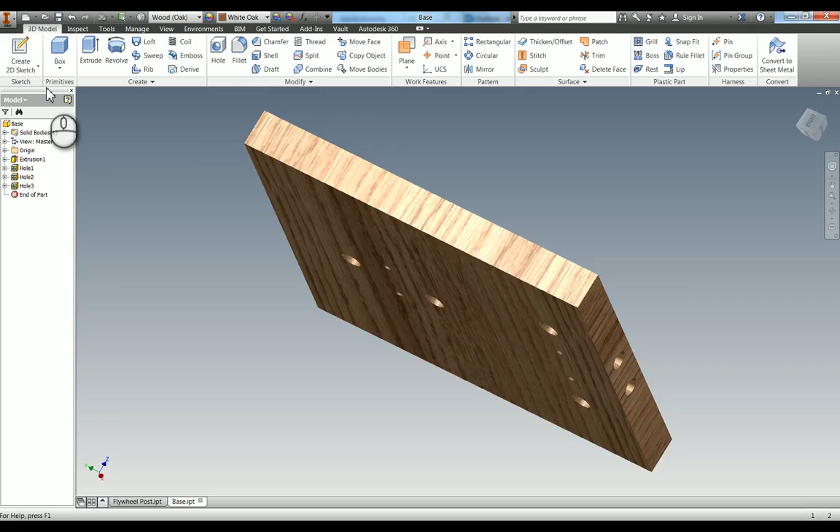We're now going to model the base. So we're going to start another new standard millimeter.ipt, and do a sketch on the XY plane.

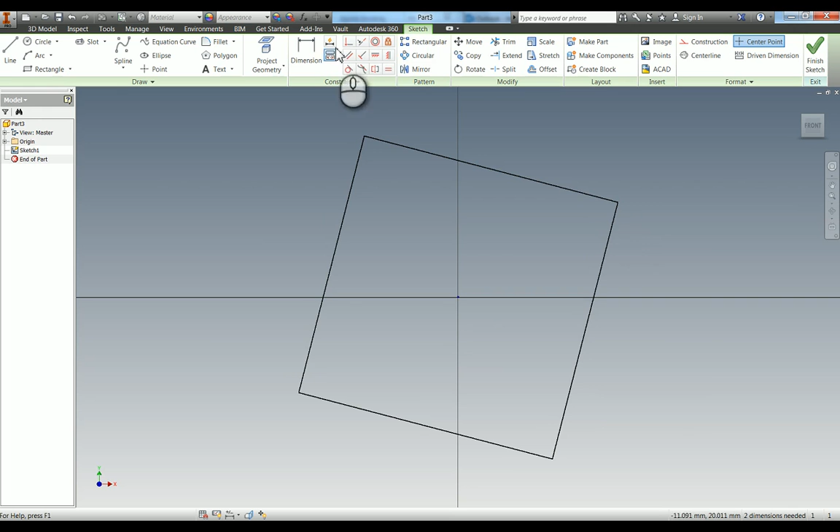We know this is 100mm square, so you could use the rectangle or the line. Just to show you a different way, I'm going to use polygon with 4 sides, which of course is a square. I'm going to draw it askew like this, just so I can show you this, make it vertical, and then put one dimension on. And we've got ourselves our part.

It's defaulted to 10mm, which is actually what we want. I'm not going to do it mid-plane because in a minute when we assemble it, I would like the bottom of the base and also the XY plane to be on the bottom of the whole assembly. So when we do the render, we can use that as a ground plane to cast a shadow and that sort of thing.

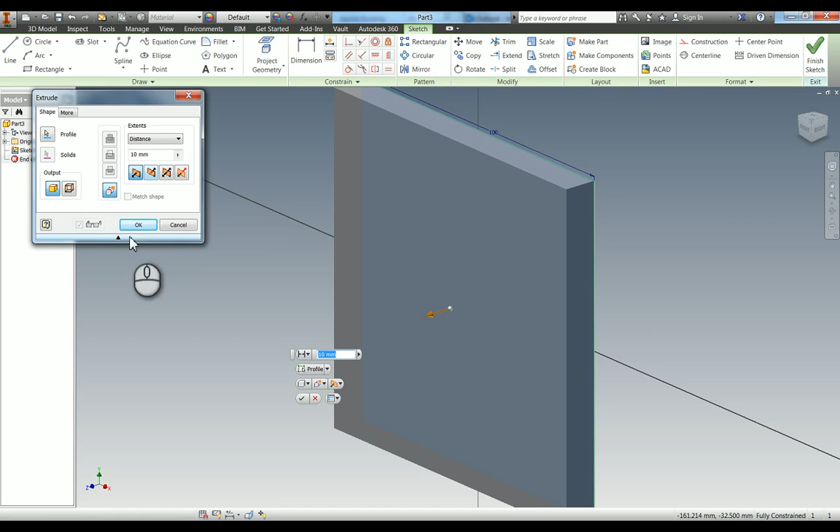So I'm going to leave the thickness at 10mm, hit OK, and whilst we're here, I'm going to change the physical properties. iProperties, physical, and this one is wood, so I'm going to use oak. I'm going to apply that and hit close. So we've got this here now, okay.

We've got 2 holes that run through the base here, so I'm going to do a sketch on this plane, and use the point like we normally do for holes. I'm going to horizontally align those 2 to each other, and then to the midpoint here. We've got the dimensions for these all from this end, so I'm going to add these 2.

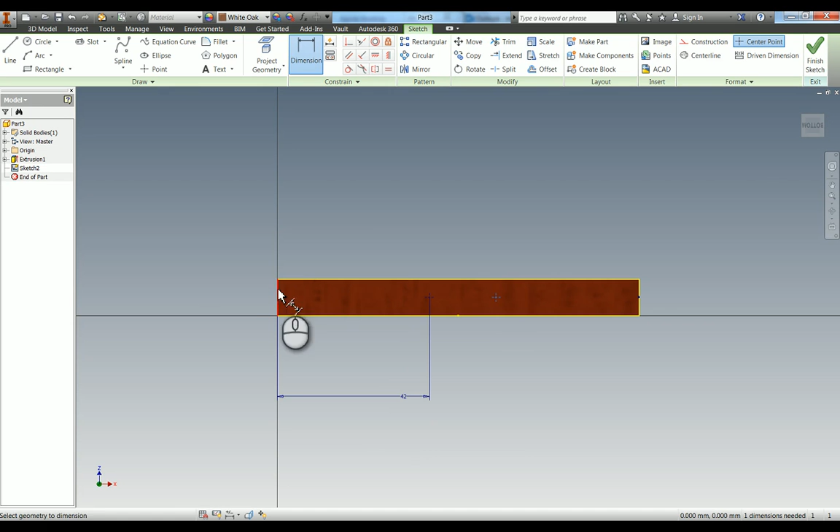So 42. I'm going to hit H for the hole tool, and you can see it's picked up both of those centres for us, and we've actually got a counter bore hole here.

So I'm going to start putting in these details. We've got a 3mm hole, which is already defaulted to not through all. It does have a distance, and that distance is 70mm. And there's actually a counter bore of 5mm in diameter, which is 10mm deep.

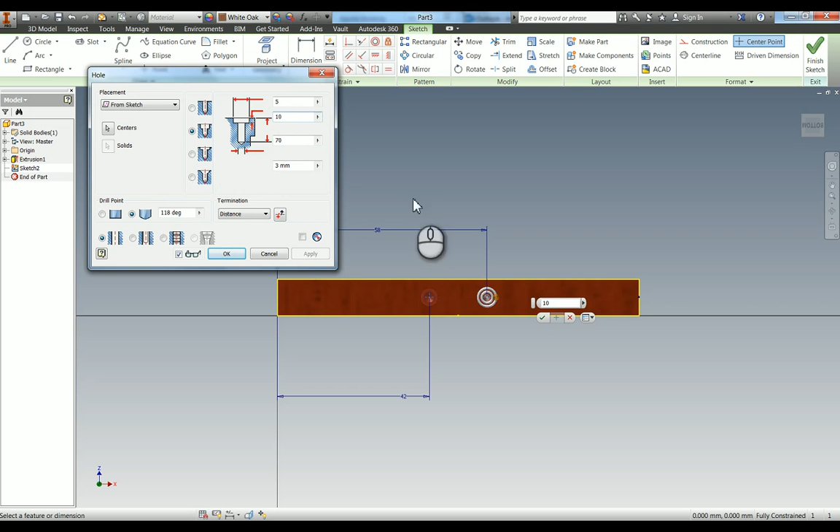Now, something that's quite important is when you look on the drawing, and this is something you'll be marked on in competitions, a mistake as small as this could cost you. These blind holes are actually flat bottomed as well, so you can see that by the plan view in the hidden details. You can see that they're actually flat bottomed, so make sure you change the selection over here before you hit OK, and check all of these are correct.

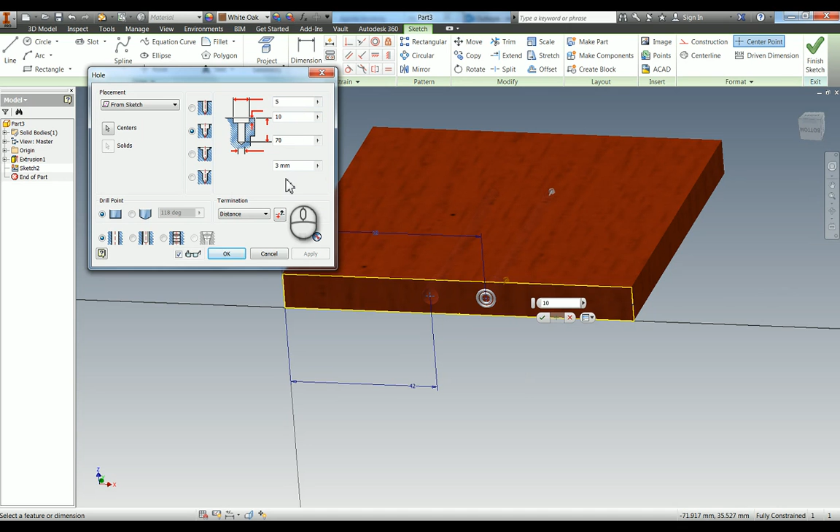So we've got a 5mm diameter counter bore, which is 10mm deep, and we've got a 3mm hole 70mm deep, so we've got all of that correct, and we've changed the drill point to flat. Now I'm going to hit OK. We've got our 2 holes in there, look, perfect.

So now there's 4 holes on this top face, so I'm going to do those next. First I'm going to do 2 more points down here, horizontally aligned with each other, and draw a construction line between the 2. I'm going to change the format of that line to construction, because these are actually around the centre point, so I'm going to align these using the midpoint of this line and then the centre point.

The distance between those 2 is 16mm, so I'm going to add a dimension of 16mm. Then the final dimension we need is in the Y direction, and they're actually 15mm from this bottom face here where the 2 holes are. Again, it's very important you get the orientation right, so before I do these holes I'm just going to check that I'm at the right edge, so I've got these 2 holes here before I draw these.

Now there's actually 4 identical holes, so we need to do the other 2 as points, but that's how you should do it.

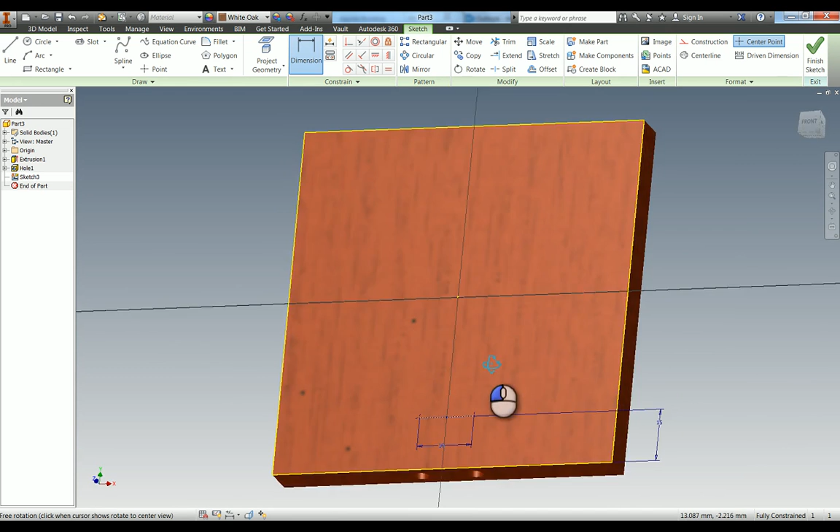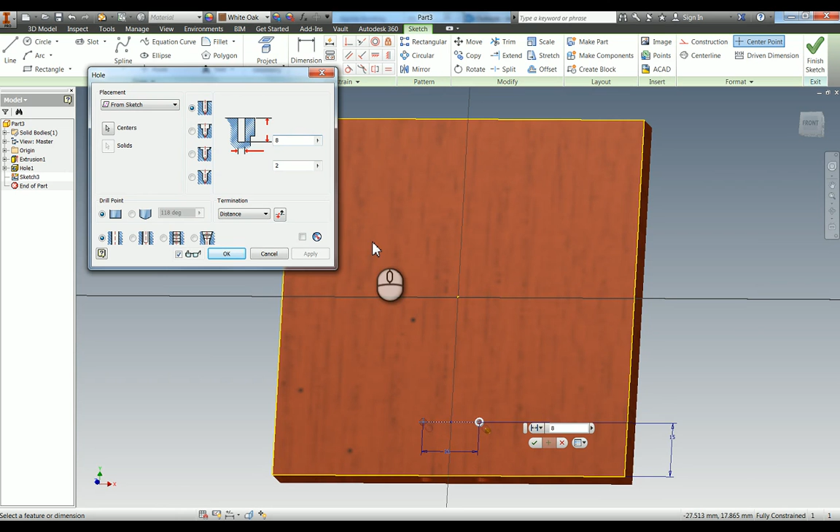I'm going to show you another way of doing this, using rectangular patterning, just to show you another tool. I'm going to put these 2 holes in, 2 of 4, and they're 2mm and 8mm deep. So we need to change it back to a simple hole, 2mm, 8mm deep. I'm just going to check on the drawings that these aren't flat holes, so we need to change it back to the angle. Hit OK. Now we've got those 2 holes that actually penetrate into here, which will become apparent when we do the assembly.

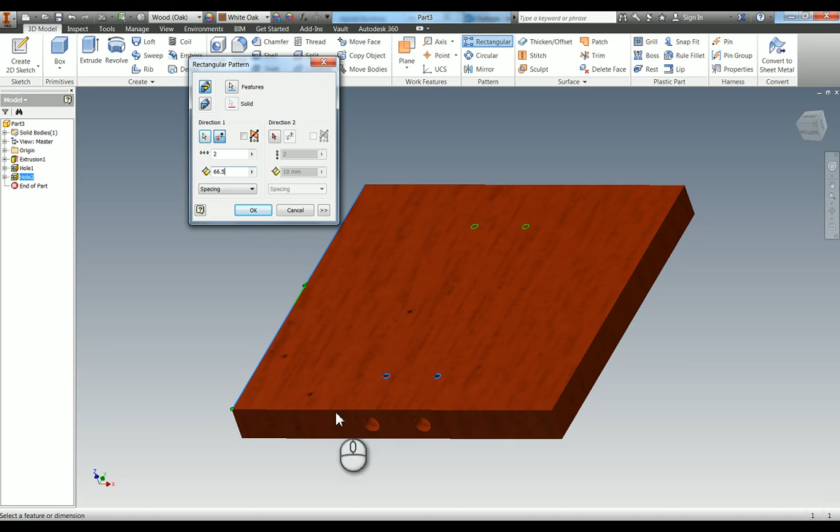We could have done those 4 points, but I'm going to use the rectangular pattern instead. First it asks what you want to pattern, so we want these 2 holes, and you need to give it a direction. I'm going to give it this edge of the base plate. You can see it's going in the wrong direction, but that's not a problem, you can flip the direction here. For the distance between these 2 holes, we've got a 66.5mm dimension, giving us the height from this bottom edge, which is 15mm away. You don't have to do the math yourself, Inventor can do it for you, so I've just put those in. Hit OK, and now you can see we've got our 4 holes.

Now on the underside of this plate there are another 4 holes. I'm going to do a sketch on there, and do all of these using points, then one hole command. I'm going to put all of those points down to start with using point in our draw. We've got 2 that are up here, and again I've drawn them out of line on purpose. I'm going to make sure they're all accurate afterwards.

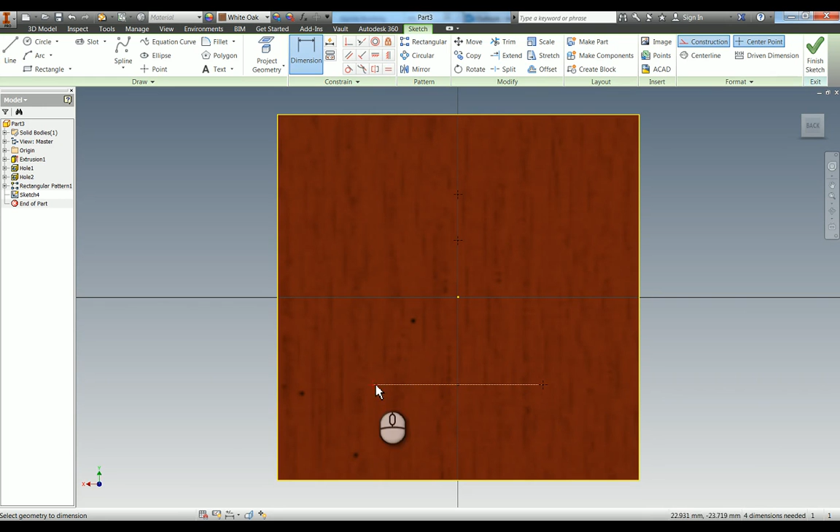So these 2 are vertically aligned with each other. They're also vertically aligned with the midpoint, and then we've got the bottom 2 down here, which are horizontally aligned. Again I'm going to use a construction line, making sure it's green so I know it's snapping to that, and then vertically align that with the midpoint as well into the centre point of that line. So we've now got all of these, and we've got this dimension from here.

Just to show you, I'm accepting this is saying it's going to be a driven dimension, and this is what you need to do - you always need to double check. So I put this dimension in here, although it's already constrained by this here. We know that this is now correct because this 72 dimension is given on our drawing, and the final one it needs is a direction in the Y, which is the same as the other hole, so it's 15mm.

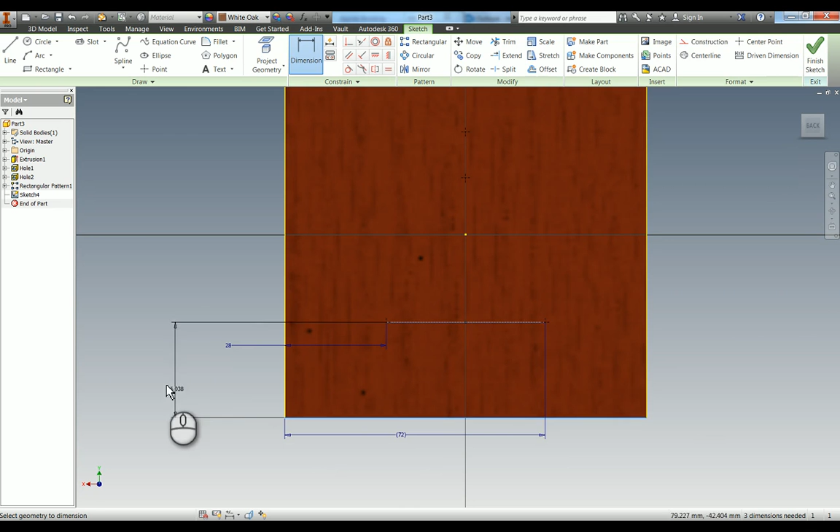And then we're going to do these last 2. Got 54, and this final one, 79. So you can now see we're fully constrained, all our geometry is blue, and I'm going to press H for the hole tool.

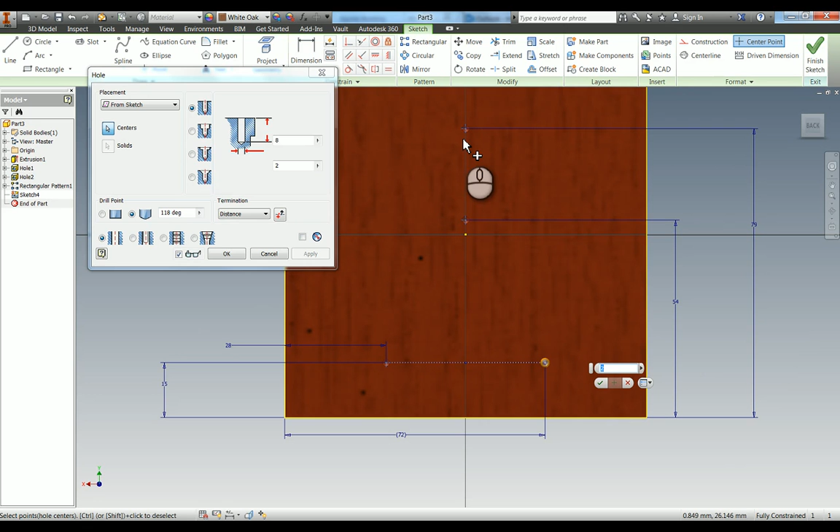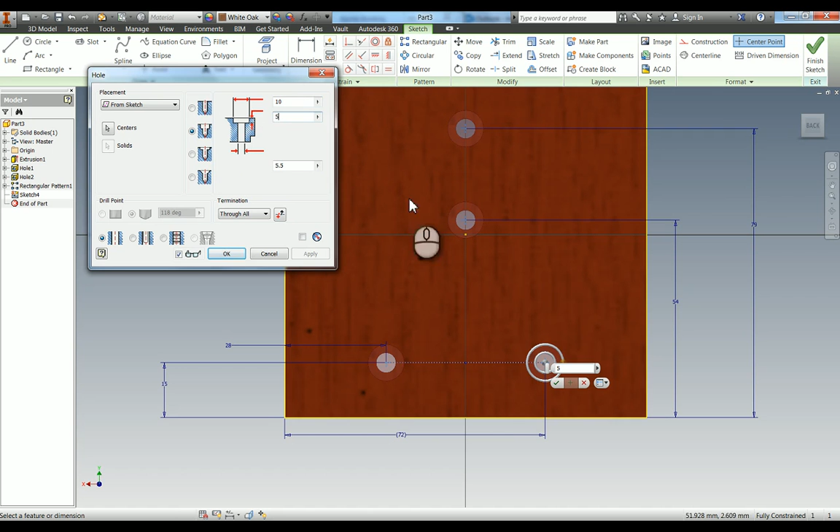These holes are 5.5mm through all, so we need to change this to through all. They're counterbores, so through all diameter is 5.5, and the counterbore is 10mm diameter, and it's actually 5mm deep, so the opposite of the ones we did earlier. You can see the preview there it's given us, and they look about right to the drawing. Hit OK, so that's now the underside of our base.

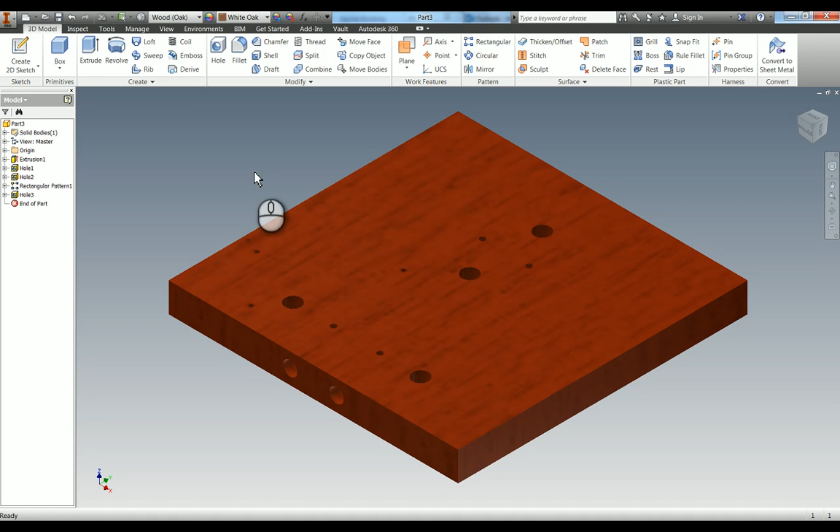Press F6, that goes to the home view, from the top side. Same as everything in competition, you need to double check everything, so I'm just going over the drawing, making sure I've got all the holes. Yep, I've got all of them, so I'm happy with that. I'm now just going to hit save, and because our project has gone into the correct place in Windows Explorer, I'm going to call that base and then save it.